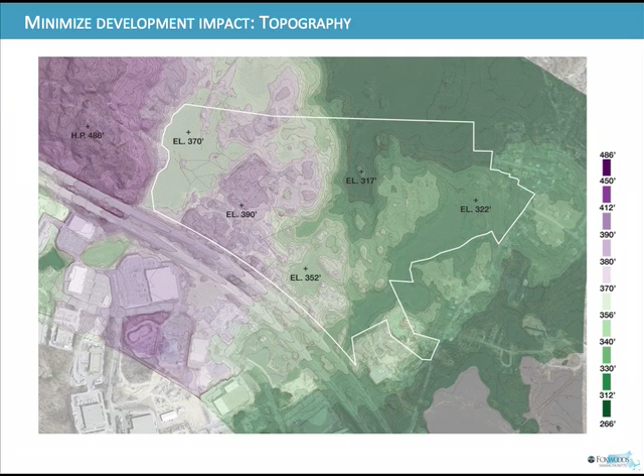You might have seen a helicopter flying around 2, 3, 4 weeks ago and hovering low—that was us. We were on a reconnaissance tour to have a look at the site and see what it looks like from the air and how all the pieces are related. And this is what we found.

From the air, 495 is one of the most dominant features near the site. The site itself, however, is second growth hardwood forest. There's a maintained clearing here under the power lines—you don't actually see the power lines, but you know they're there because the ground is cleared underneath them.

Across the way in the commercial industrial zone, you have a lot of very large rooftops—maybe 100,000 square feet here—and a lot of open parking areas. In general, this kind of development is more like 50 or 60% impervious, whereas what we're talking about is more like 20 or 25% impervious.

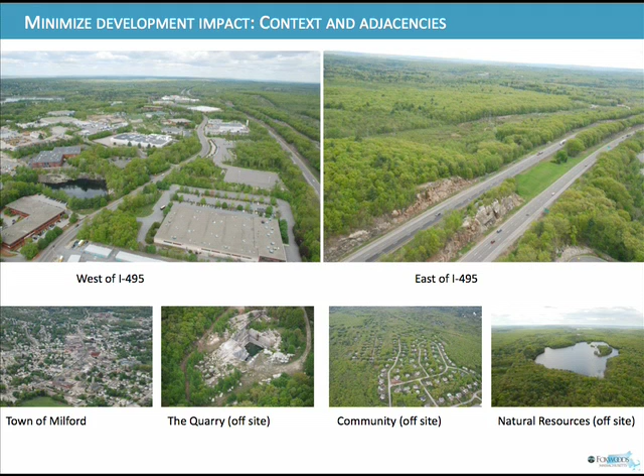We also saw the town of Milford, compact development, a quarry nearby, and the nature of the residential community down along West Main Street. And we saw the ponds, wetlands, and vernal pools that Sean was talking about.

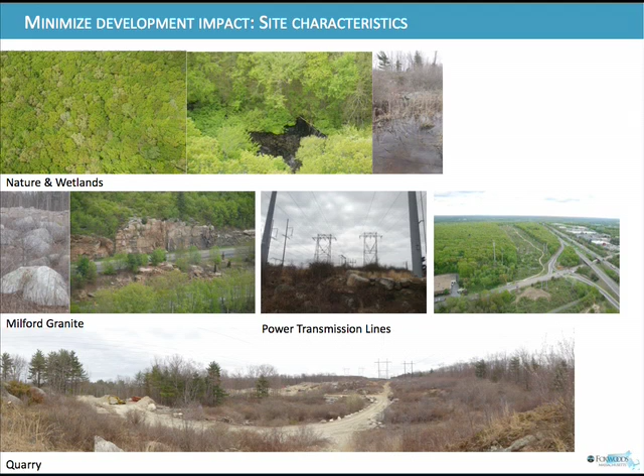When we got down on site, we visited several times, and over the course of the last 6 weeks, while we've been working intensively, it changed from winter to summer. So we've seen the site in both conditions, when it's open land and when it's completely closed over. We marveled at the rocky outcrops and the beauty of that terrain.

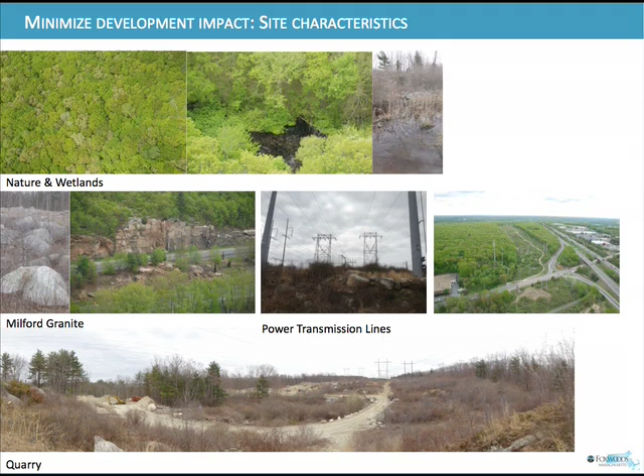We also remarked on the way the site has the potential for great recreation land. We know that just across the border, and even in parts of this site, there are great mountain biking trails. We know that can be enhanced and added to with multi-use recreational trails—walking, hiking, strolling, and educational uses.

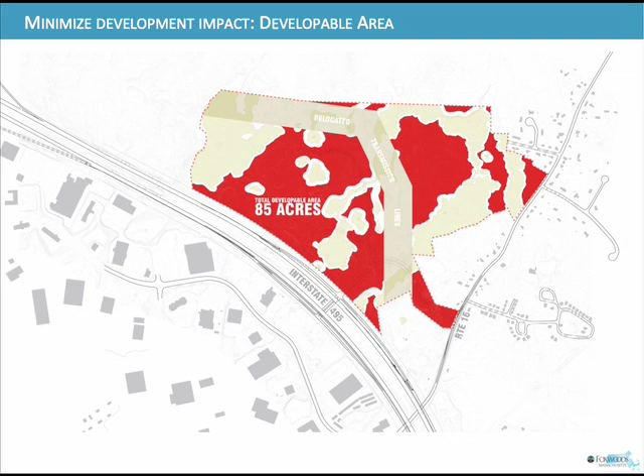As Sean pointed out, there are really just 2 areas to develop, totaling 85 acres. And the access to the site proposed here comes off 495, the CD roads, and the road in. This little traffic circle that's going to be developed is the access to the site.

Putting all that together, as pointed out, there were 2 potential areas. What we've said is that the area near the highway and away from the residential development is the best place to develop, and that the other piece will be saved as 20 or 30 acres of managed woodland forest recreation land.

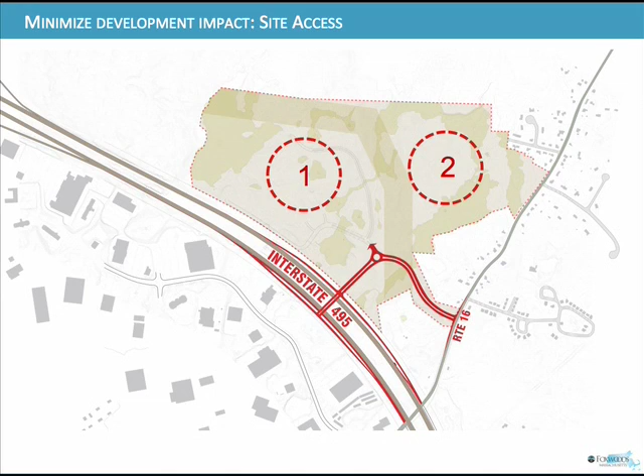The second phase, built on the success of the first phase, reflects that this is a resort people are going to very much want to come to, and there will be demand for additional hotel rooms.

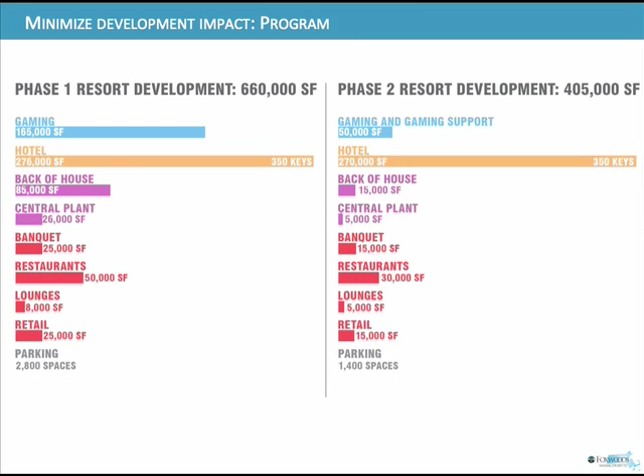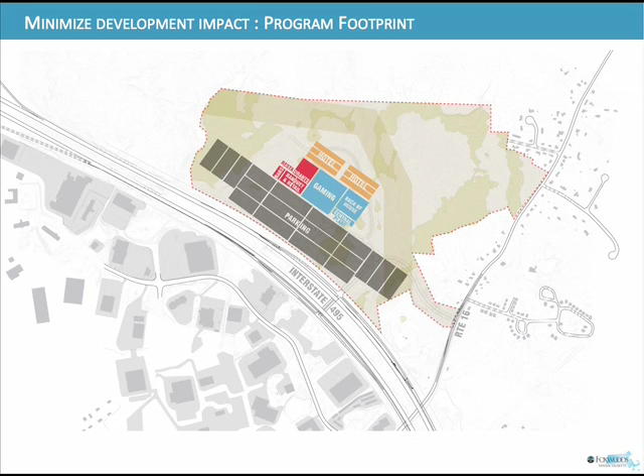Now, if we take that square footage and spread it out evenly, like spreading it all out on a football field, it looks like this, which is actually more like 10 football fields. But that's not our intention. The intention is to minimize impact, and the way to do that is to bring all of this together and to stack the building up.

So the parking garages stack into structured parking. The hotel rooms, the hotel, stacks up into 5 or 6 stories. The back-of-house uses and the service facilities get tucked underneath the building. So this compacts the whole thing to this small footprint here. The actual building footprint, as you can see, is about 17 acres, or approximately 9%, a little under 10% of the site.

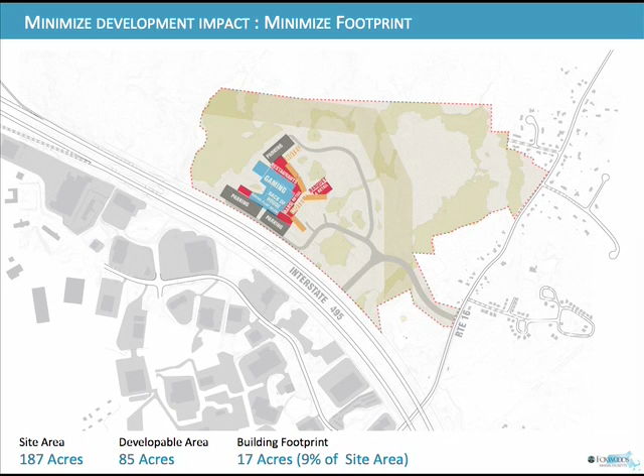There will be additionally roads, shown here in the light gray around the bottom, that will also produce some impervious area. That's for the environmentalists, something to look at. But the main point is that of the current site, 10% will have buildings on it. The other 90% will be open to the sky, just as it is now.

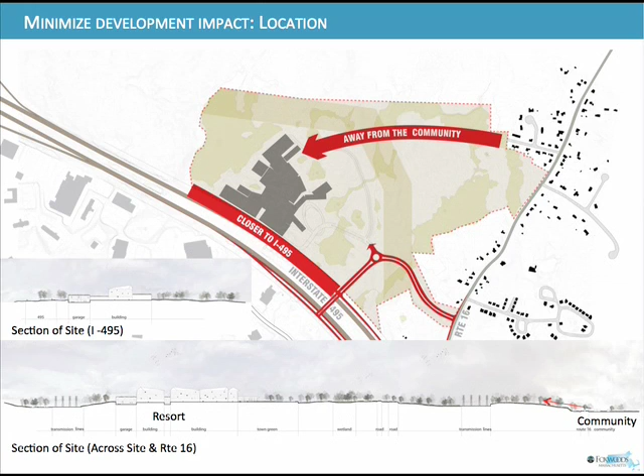So, summarizing the minimizing of impact, we're well away from the existing residents. We're tucked closer to 495. And down at the bottom are some sections through the site. So you can see here is the residential community, and here are the power lines. And over here, 2,400 feet away, is the resort development, and in between is all of that woodland. You can see that from down here, you have to look uphill, you look at trees, and if you continued looking that direction, you wouldn't see the casino. So we'll get to that in a little minute, too.

The second of our guiding principles was to embrace the New England design aesthetic. We think of this in terms of, first of all, the landscape and the great variety of New England's landscape, from wetlands to seacoasts to rocky lands to open meadows, to wetlands with trails in it, to agricultural fields, woodland trails, the whole gamut. And of course, through the seasons, we get the change of colors.

Next, we thought about the structures that are built in New England: the covered bridges, the barns, the traditional architecture of the New England states, an architecture produced by flinty craftsmen, really, people who had a minimalist approach to solving problems, who were very good at solving problems. You know, the reason that covered bridges exist, the roof on the bridge was to protect the structure from the weather, and that's why we have covered bridges.

The shapes and forms that we use are generally fairly simple geometric forms, and so this inspires us in our architectural design.

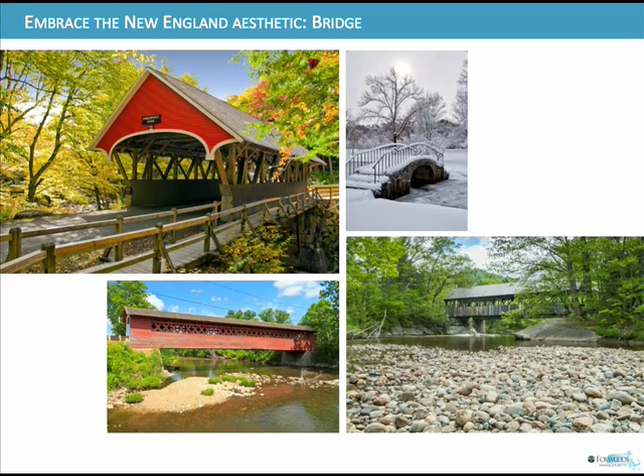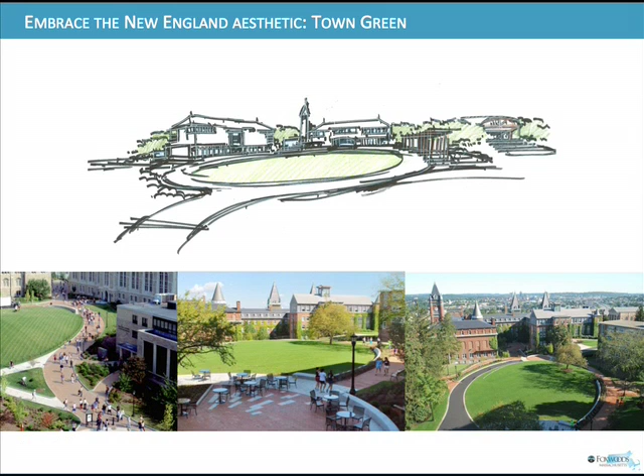Another organizing element that we use in towns, in campuses, is the green, or the quad, or the common. These come in every different shape and form that you can imagine. I'm reminded of the five-sided common in Cambridge, Massachusetts, to the traditional town greens that you find in small towns throughout the region, or the college campus quad. The great thing about this is that it's a space that you come to and you can see all the buildings. You can sense how the whole thing goes together from that one space. So that's an inspiration to us.

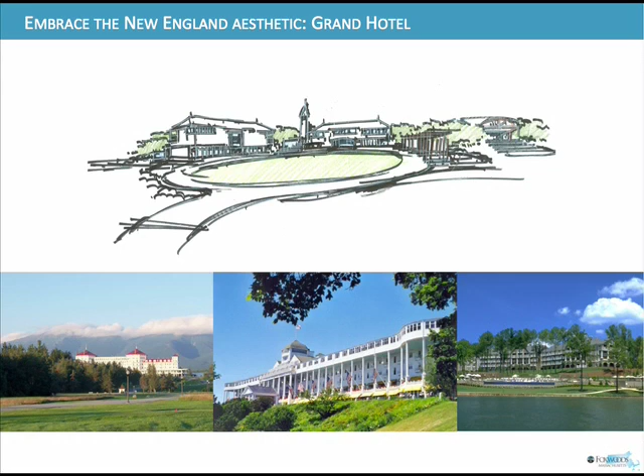Another is the grand hotels and the way they occupy the lands and the sites where they're located. These are large buildings, but they're kept in scale with their site, and they always have a close relationship in some way to the landscape they occupy. For instance, you see here, this is clearly oriented to a grand view out across the landscape. Here's one that's in intimate, almost a conversation, with the lake in front of it. So there's an intentional relationship between the building and the landscape. Here's the Mount Washington Hotel, which of course has that grand relationship not only with the forest but with the hills behind.

These buildings often have porches, and one of the reasons for that is that the New England climate, even though we do get heat waves and we do get blizzards, most of the time it's pleasant to be outside. The porch, or the terrace, or the colonnade is that kind of space that mediates between inside and outside. So part of our intention is really to celebrate that permeability of the building skin. This resort will not be just inside and it won't be just outside. It'll be a place where you can come and go, get outside for a walk, come inside for the activities or a meal.

The stone walls, stonework in general, is a great New England treasure. Driving around Milford, I've been astounded at the variety of ways people have used the local stone for retaining walls, stairs, building foundations, stone walls that separate fields, and edging and paving of every sort. We take great inspiration from that, and we want to build it into the resort in all possible ways.

To engage the natural landscape, we've called on the services of a team member. We're a completely integrated team. Sean is a civil engineer, and Phil Colleran from CRJA is a landscape architect with long experience. We've all worked together very closely in producing this design, and we owe a lot to CRJA for the landscape design work.

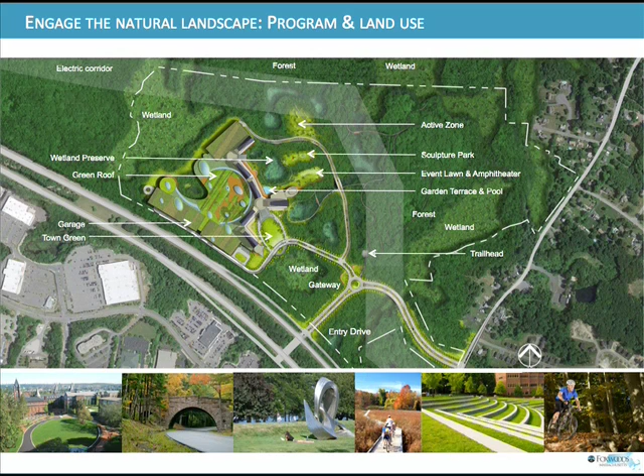Before we start a project like this, we always look to the overall site program and what creates the makeup of a project like this. For this project, we want to embrace the New England aesthetic, and as David mentioned, the town green. It's through the use of materials we'll use within the site, bringing in culturally significant spaces such as sculpture parks and performance areas, tying the connections to the site back into the town, the community, the resort experience, and creating open space that you can use when you come to the resort, but that will also be available for the town.

Engaging the natural landscape, it's very important for us to respect the site and the New England aesthetic, but also create a program that benefits the community as well as the resort itself. We're looking at a variety of programmatic elements, both active and passive, that will service a four-season resort and service the community from a four-season aspect. The community is a big piece for this project. We really care about the community and want to integrate and connect back into it.

Certain aspects we can use in terms of the environmental aspects, which are heavy on this project, are mitigating the wetlands to a point where they could be used from an educational component. School systems could come in and learn about the overall systems, how they operate within the site. There'll be open space components used as parkland and connections back into the community, as well as event spaces for weddings and other activities, and even space for community farmers markets. You should really think about the area outside of the resort as a big park that integrates within the resort experience, but the communal experience as well.

The vegetation around the site will be set up to choreograph your experience as you enter and move into the site, which will also help mitigate the wetlands. The New England forest experience will revegetate large swaths of the site. There'll be formal gardens around the architecture and surrounding parts of the site, and also an extensive roof garden, a green roof system, which will help reduce heat mitigation and the heat island effect throughout the site, creating a much greener and sustainable project.

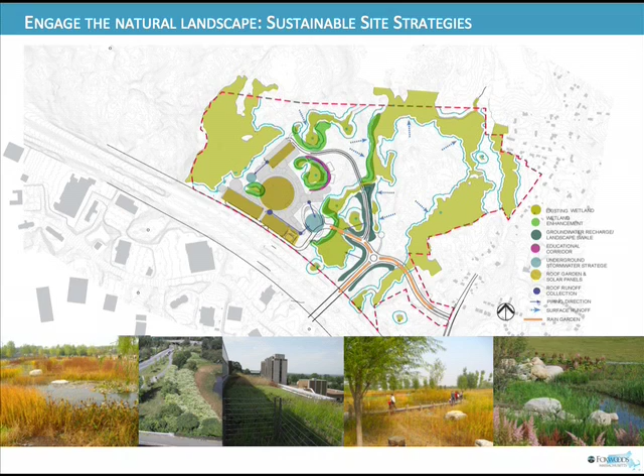This aspect of sustainability is very important to the team, the developer, and our commitment to the town. We're going to use state-of-the-art sustainable techniques, from advanced stormwater techniques to rain gardens and water collection, with extensive mitigation to the wetlands and respect for the wetlands. In fact, we foresee the wetlands actually working better after the development than they do right now because of the ways we'll mitigate them. You can envision the site utilizing these stormwater techniques with wetland enhancement, infiltration, and rain gardens, all moving toward creating a workable environmental system that's obvious to the users and the community.

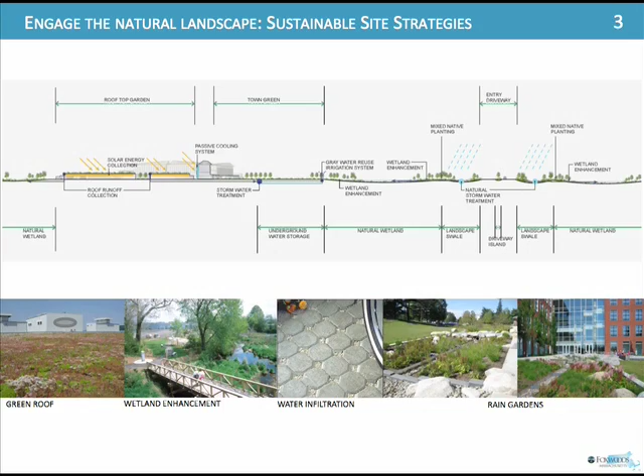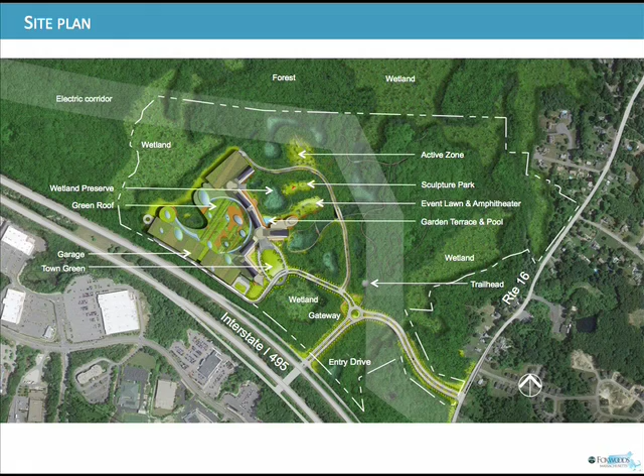Thanks, Phil. The reason these two slides look exactly the same is because they're very similar. I just wanted to point out the building is organized around the gaming in the same way that the buildings on the outside are organized around the town green. We'll get into that in a minute.

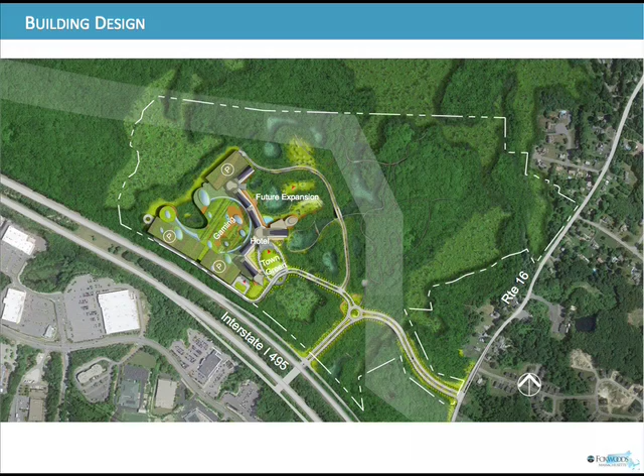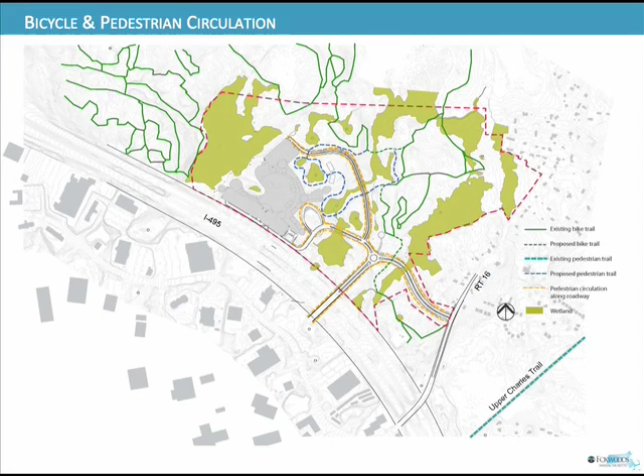Very quickly, this is the roadway access into the site, and this is the pedestrian and biking trails that will go throughout the site. This is the organization of the building as we have designed it.

Here is the gaming hall. The way the industry works, they like to have all of this in one place, so what we've done is dispersed all of the other activities around it. Here is the main entry to the hotel, and this is retail and eating establishments. Here is a bus drop-off, and near there is the food court. These are the parking garages here, buffering the building from the highway, and there is a main entrance into this circulation space from the garages.

Here is a sports bar. All of these things look out over the wetland and the landscape, and here more retail opportunities looking out in that direction.

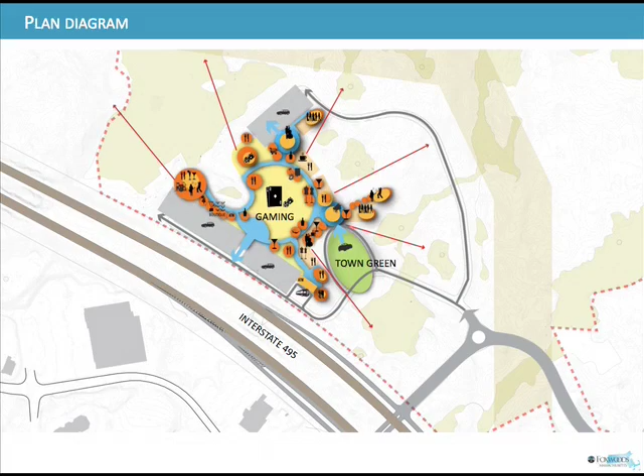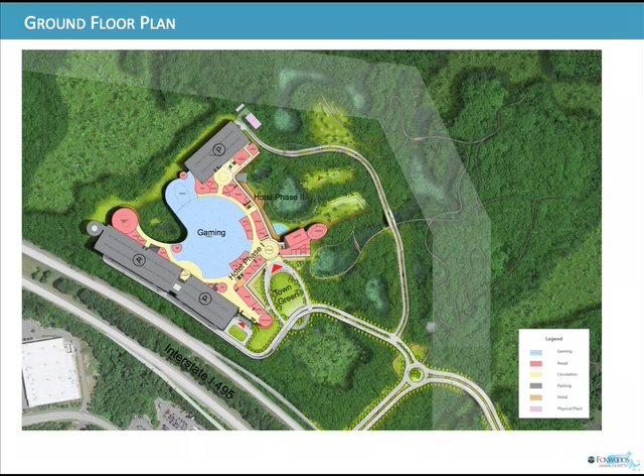Now, when we take that and turn it into an architectural plan, it looks like this, where the parking is here, the gaming is there. The food services are all around the outside. This is the meeting hall, the banquet hall, the main ballroom, and all of these things are related very closely out to the landscape.

This is the upper level of the building, and so these are hotel rooms, 5 stories high. There's about 24 rooms in each one of these bars.

I should point out that these 3 wrapping around the town green, along with the ballroom and the meeting space and the garages and the gaming hall, form phase 1. These 3 hotel bars along through here and this parking garage form the second phase of the development. Everything I've shown you and everything we've talked about has been both phases together within the design.

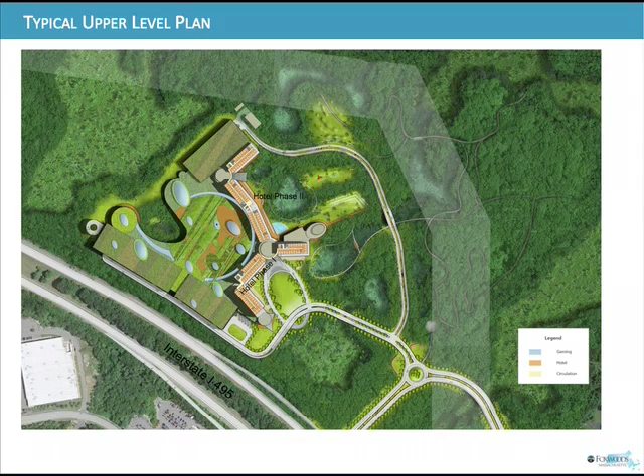The building itself will also be highly sustainable. We know that we can do much better than business as usual. We can save a lot of energy to support those cooling loads and to reduce the cooling loads, and we can save a lot of water.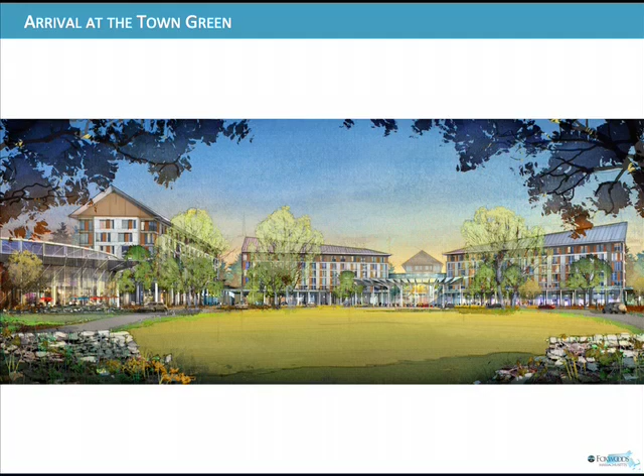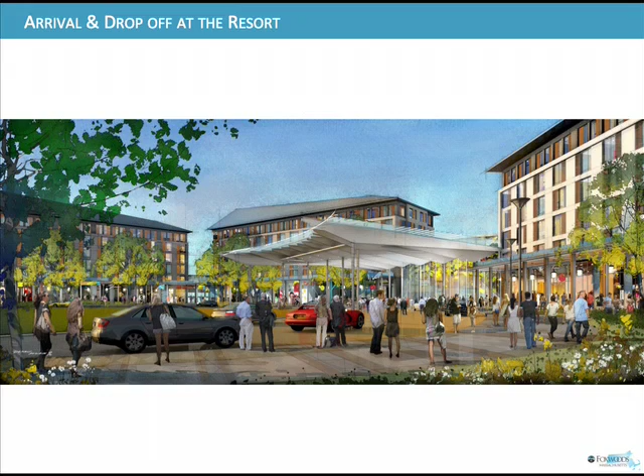Closer up, this is the porte cochere in an evening view. It's a very active place, the sort of center of activities of the outside of the building where everybody will be coming in.

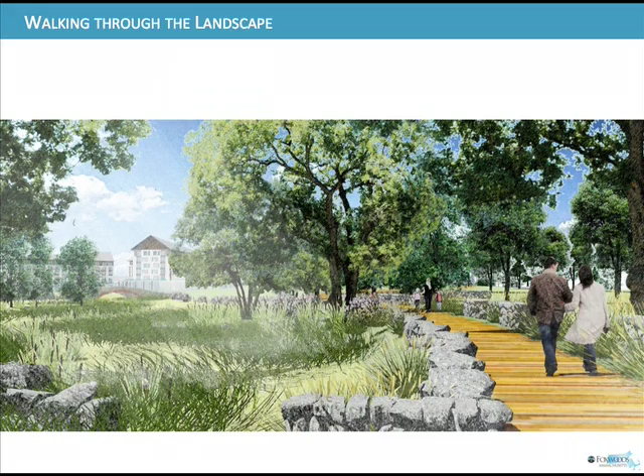Also around the building, you will see this kind of informal landscape development, places to go for a walk, places to get outside and have some fresh air. These are the kinds of places and activities that Phil spoke about. Closer into the building is a more manicured landscape.

It's been a pleasure, Scott.